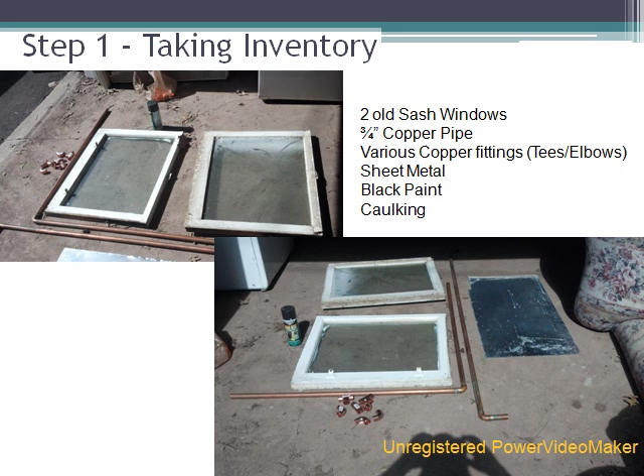Here you can see just another view, and the paint that I used was a high heat version that was a flat black that I had found in my garage from an old project for painting a barbecue.

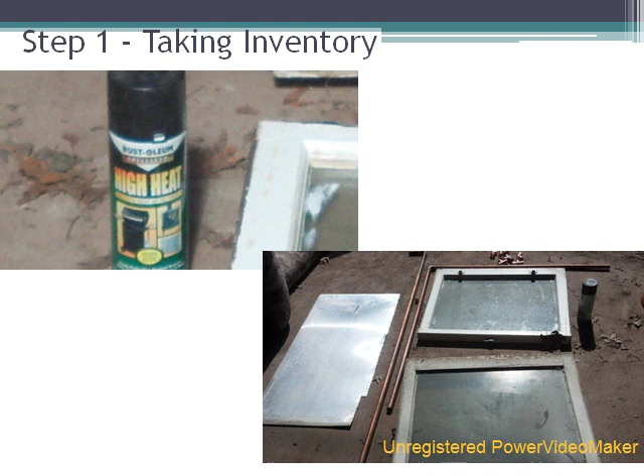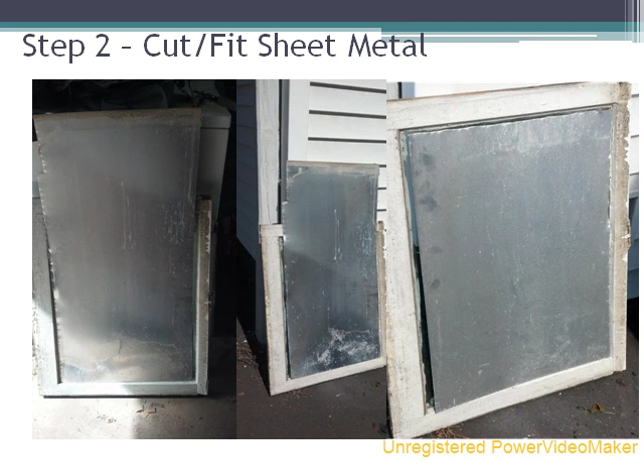Step two was really to cut the sheet metal to fit within the window frame, and you can see it was a little long, so I just used some basic tin snips to cut it to size. And step three, I painted the sheet metal with the flat black paint, and then let it dry for 15-20 minutes.

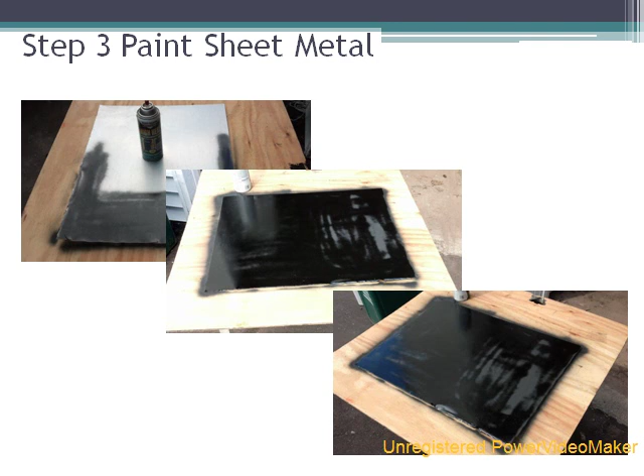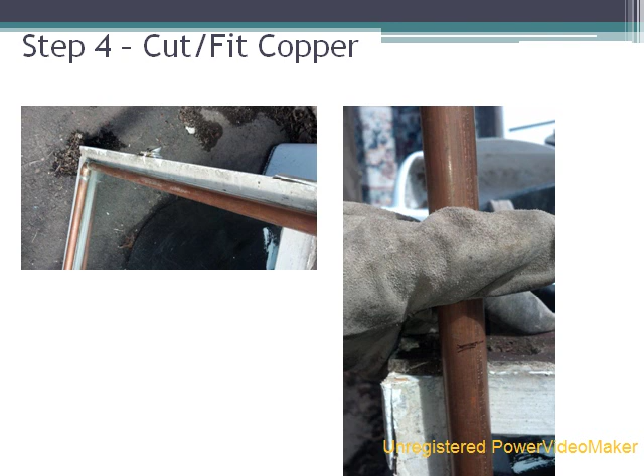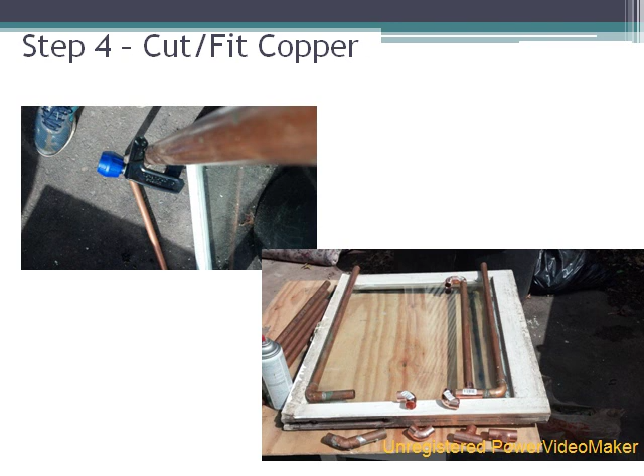Step four, which was the most time consuming, was really to fit the copper together so that it was within the window frame, and I had to cut it with just a tube cutter, and you can see that I started to cut the pieces and then start to fit the elbows and the T's together, so that it made a circulating air within the tubing.

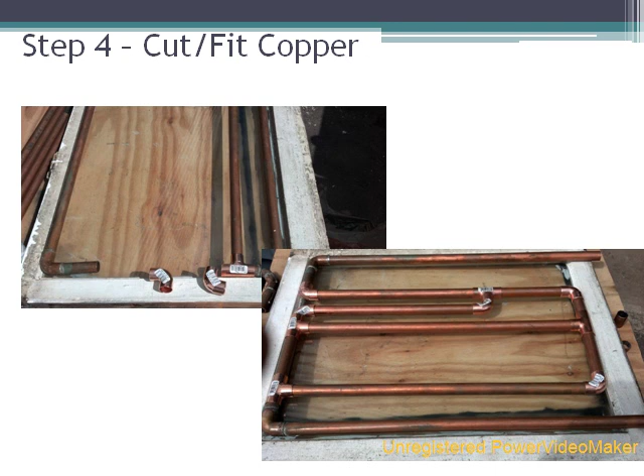Here's just another shot as I started to fit some more together, and again another shot as it started to come together.

Now once the copper was all fitted together, what I wanted to do was notch out the window frame so part of the copper would have input and exit holes sticking out of the frame. So I used just a portable circular saw and cut the edges off there so that I could start to notch that out.

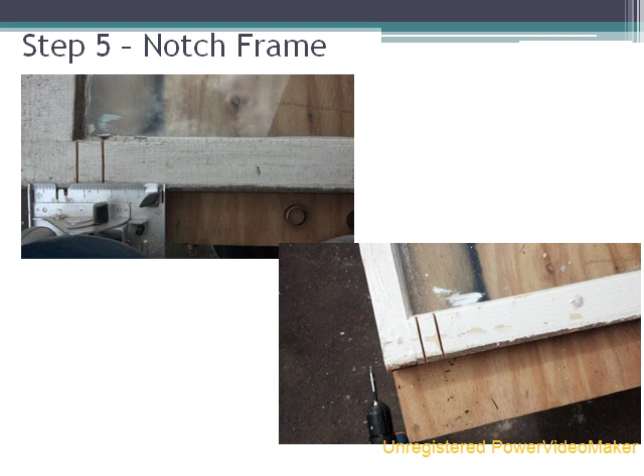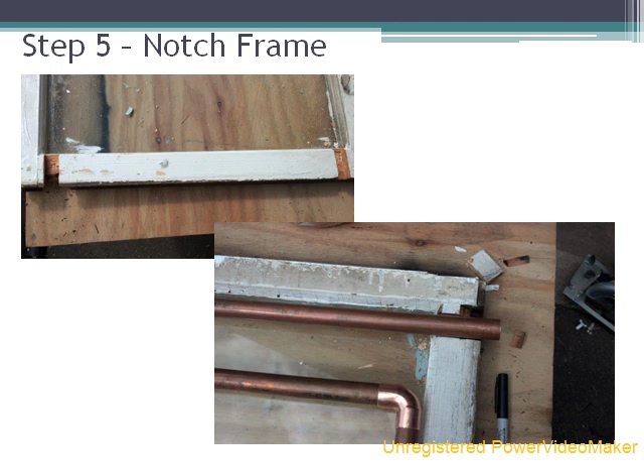On the top left there, you can see I actually notched out the pieces that would actually fit the copper. You can see in the right picture there, the copper actually sits very nicely inside there. I did the same thing to the upper frame, where I notched out the same mirror image, I guess, so that they would fit together flush.

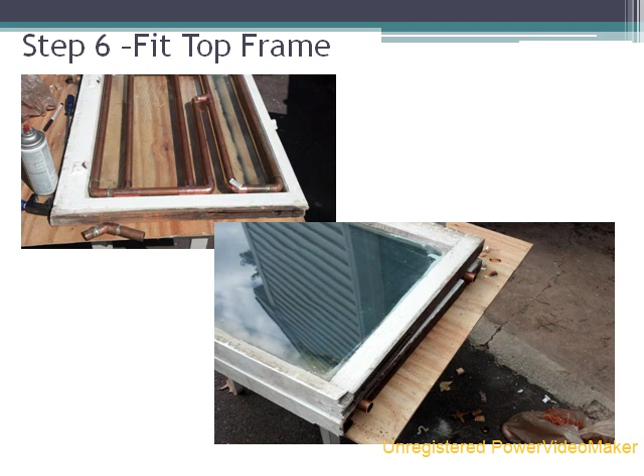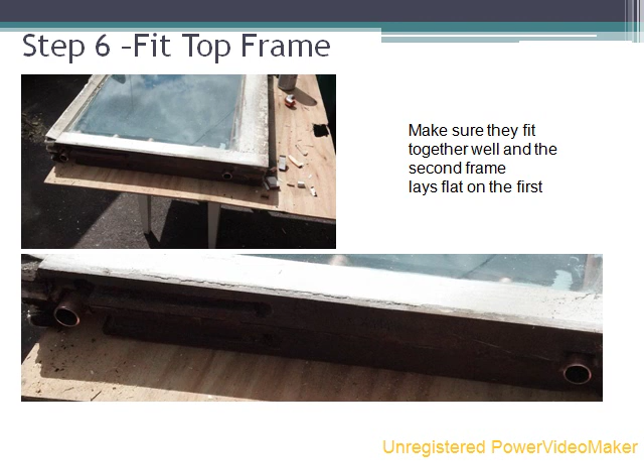And you can see the two pieces of copper coming out of the top of the unit. One could be an entry point, one could be an exit point. Here's another view of the copper pieces sticking out as the two window frames are put together. And I just made sure that they laid flat so that there was minimal gaps between the two frames.

And then I just screwed them together using just normal drywall screws. And I put in here a thermometer to measure the performance. And you can see that inside there it was a little over 70 degrees.

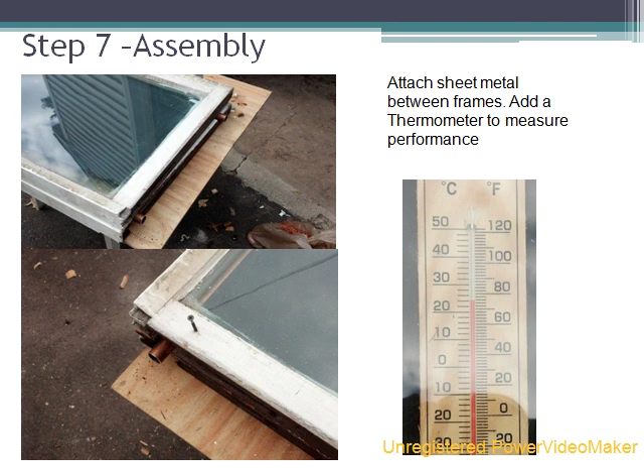Then I started to seal the edges with caulking just to restrict any airflow leaving the internal unit. So I want to keep the heat in where it's supposed to be.

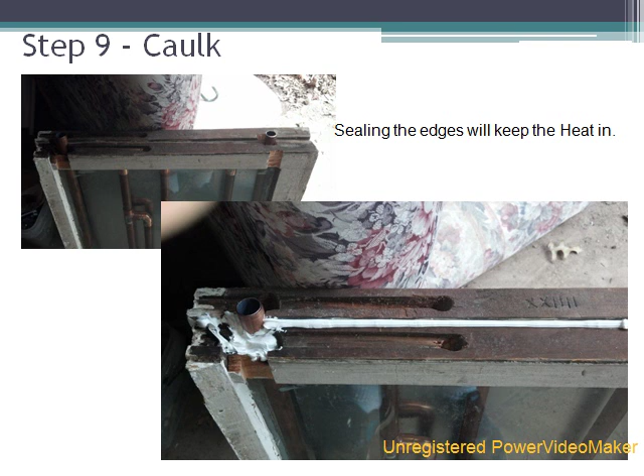And then step 10 is the finished unit with all the copper pieces together, the sheet metal in place, and you can see I put in the thermometer on the other side. And what I'm going to be testing is the heat transfer from the front of the unit back into the area where the actual copper pipe is going to be, and how well that performs.

As a next step, based on that measurement, I might just paint the whole unit on the inside black to help the transfer of heat from the front part of the unit to the back.

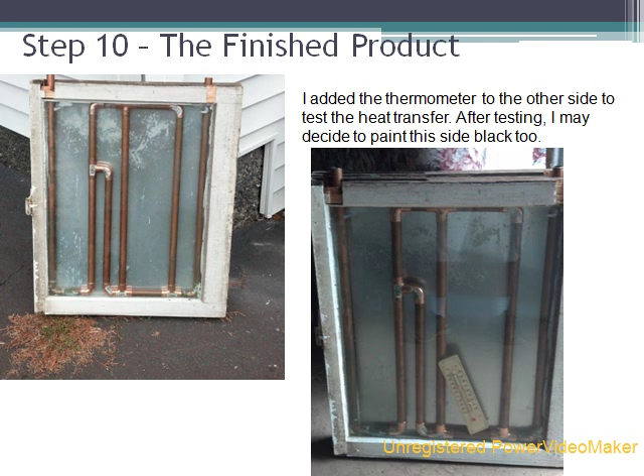This concludes this session on how to create a window air heater in 10 easy steps using spare parts from your garage.